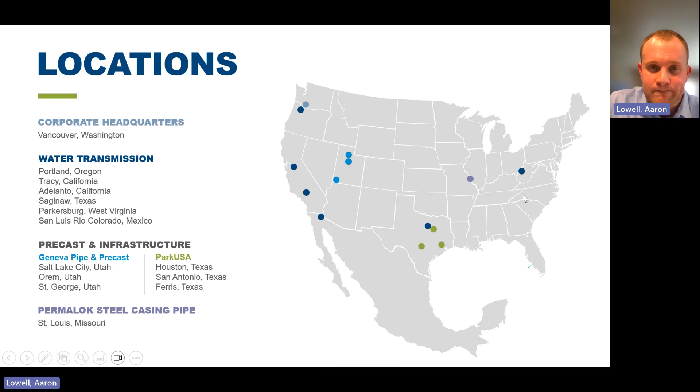Now, this line card here, I run around the Western region. I actually have this printed out on a little note card with my face on it, but this is our announcement to the industry that, hey, we're out there, we're manufacturing ParkUSA products out west at Geneva Pipe and Precast in Utah. You'll see some products there listed to the left, but we're not just limited to those products. That's kind of my main focus to get us started for really this first year and a half that we've been doing this.

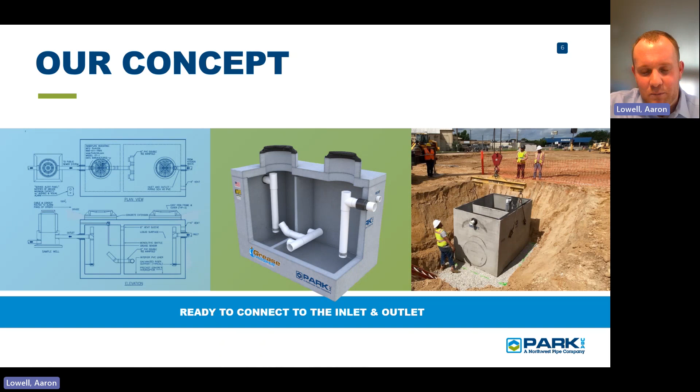So ParkUSA's concept is to take products that are pre-engineered, pre-approved, and pre-assembled for easy on-site installation by the contractor. And you'll see here, this example is a grease interceptor, and you'll see that it's all pre-plumbed. And I'm going to mention this throughout the presentation today. All of our products come to the job site pre-plumbed. So we provide a really nice value for the contractor that they don't really need to mess around with any of those internal components.

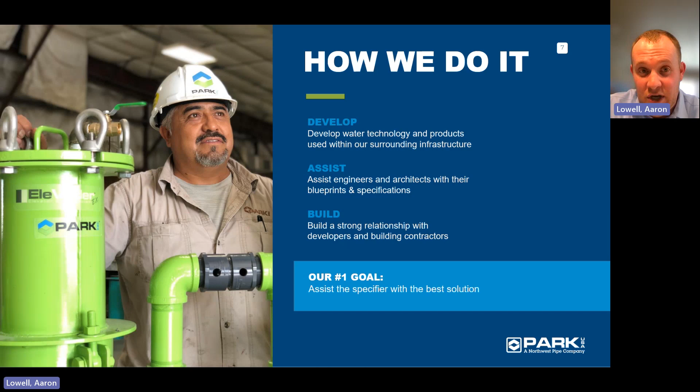So how has Park done this over the years? Well, we've been a very innovative company. The founders of the company have 6 patents in their name, including the oil stop valve, which Felisa is going to get into in about 20 minutes when we get to the wastewater portion. But Park's goal is to assist the specifying engineer with the best water solution for your project.

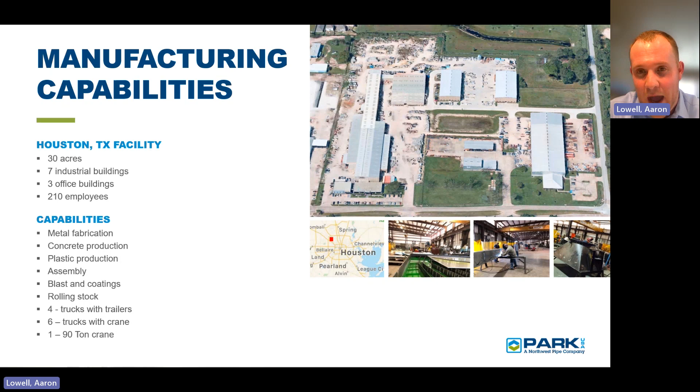Down in Texas, we have 10 delivery trucks running around the Houston area, and 6 of those are what's called a boom truck, or a crane truck for short. And these trucks are capable of offloading themselves, so they can offload about 15 to 18,000 pounds, depending on how far we have to swing the concrete off the truck. So that's a really nice value. And we're going to see several examples of that coming up throughout the slides.

This slide highlights a main product overview of all of the solutions provided by ParkUSA in all the different categories. So I'm going to kick off the presentation by talking about water distribution and pump lift stations. And then I'm going to transfer the presentation over to Felisa, and she's going to walk us through our wastewater, our stormwater, and our monitoring system products.

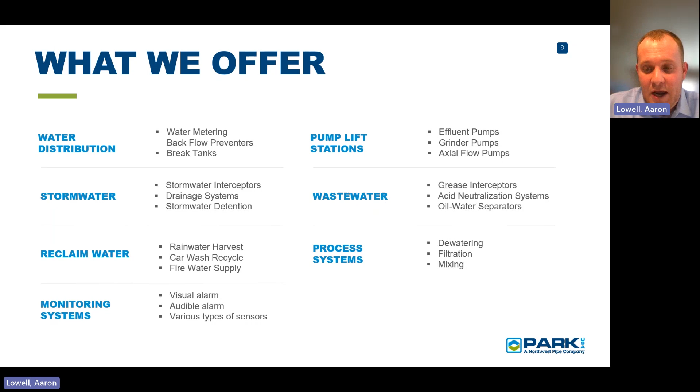So ParkUSA actually manufactures technology that kind of sets us apart from the competition. Let me give you an example. A grease interceptor with a sensor that can tell the owner if it needs to be maintained. So that's pretty cool. You'll see there reclaim water. We do a lot of the car wash reclaim tanks. Every new car wash they're building right now, which it seems that they can't build them fast enough right now. I know we're working on so many projects out west, but every job has about 4 or 5 different concrete vaults for us to provide. So that's really good business.

Okay, I'm going to get into our first category here, and this is water distribution. I'll give you a little background. This is really how ParkUSA got started. The company was founded in 1984, and the original founder of the company worked as a pipe fitter for a mechanical contractor in Houston. And so he would have to source these water meter vaults and deal with different vendors that supplied the concrete, the access hatches, the valves, the water meters, etc. And as the story was told to me, he got fed up with this and said, why don't I just do this on my own? And of course, founded the company in 1984.

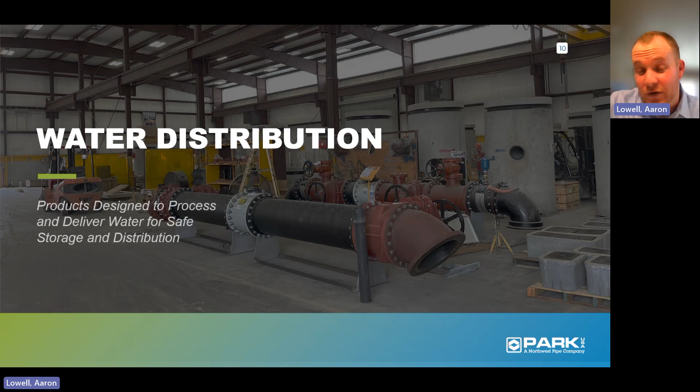So I'm going to start by playing a 1-minute video here. And what I want to highlight again is that our products are coming to the job site pre-plumbed. And for water distribution, they're also pressure tested before delivery. So enjoy the video here.

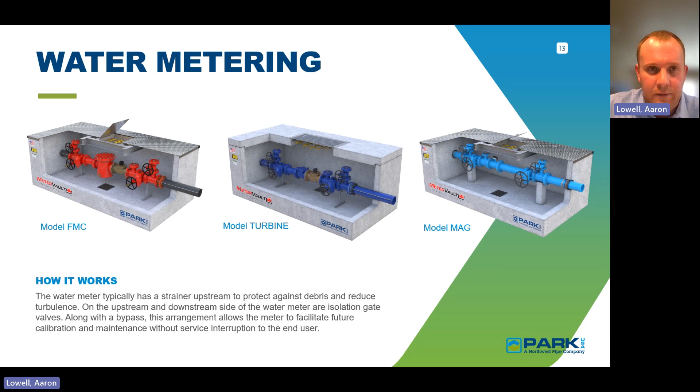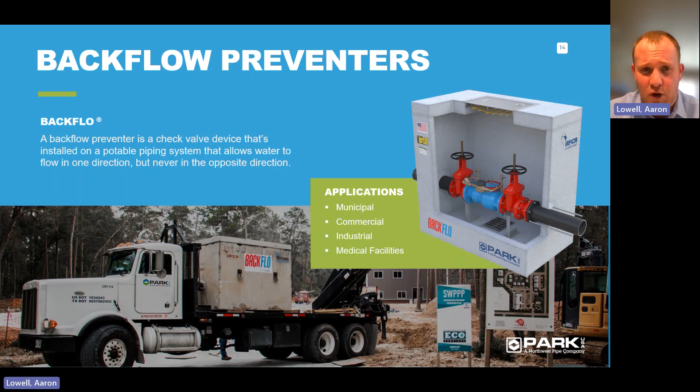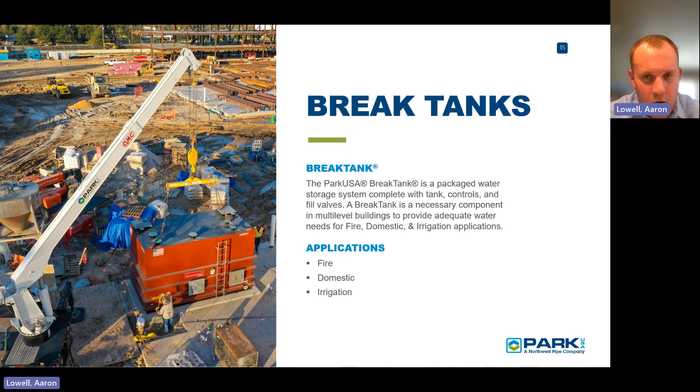Over there to the left, you can see that's an example of our boom truck. That's one of our larger crane trucks there, as an example. And also for the rectangular steel construction units, we can actually put a wall down the middle of the tank, and you can actually separate different water uses. So if you wanted fire water or vehicle washing water or irrigation, we can put it all in the same tank.

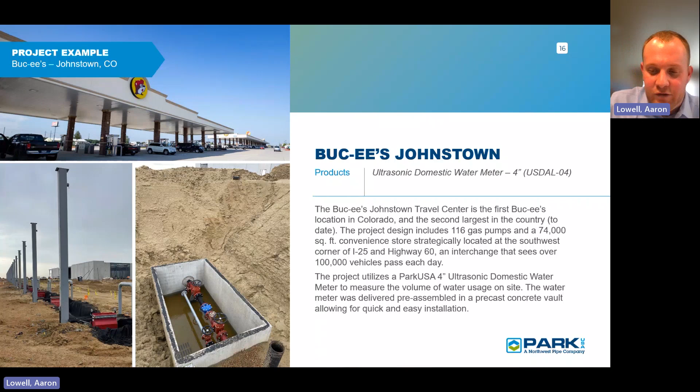But the engineer was out of Texas and they spec'd out on the plans our 4-inch water meter vault with a 2-inch bypass. So I'll take you in a little closer here. You can see all the water in the vault. We probably got an inch or two of rain that day. That pipe spool in the middle, that black pipe, that's actually where the water meter goes.

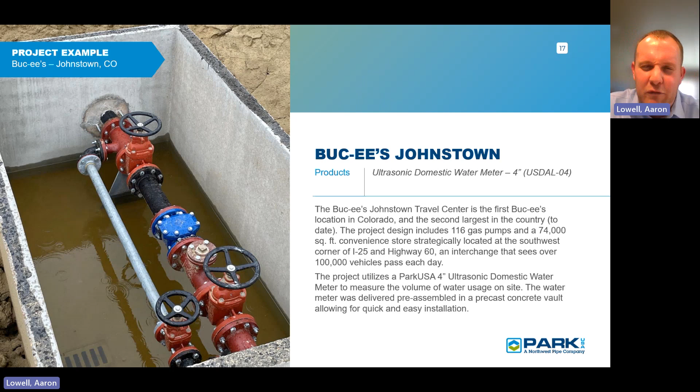So for this structure in Johnstown, Colorado, we did not supply the water meter. It was actually supplied by the city. And we do that all the time. There's a lot of municipalities that prefer to provide the meter themselves, and that's fine. We can still provide the vault fully assembled. You can see the 2-inch bypass piping on there. So it'll be fun to visit Buc-ee's here. The site's located about 40 miles north of Denver on Interstate I-25, just south of Fort Collins.

Okay, so that wraps it up for water distribution. I'm going to move into pump lift stations. And these are really cool. So what I've found in my travels is that sometimes the civil engineer and the mechanical engineer feel that lift stations are a little bit outside of their realm.

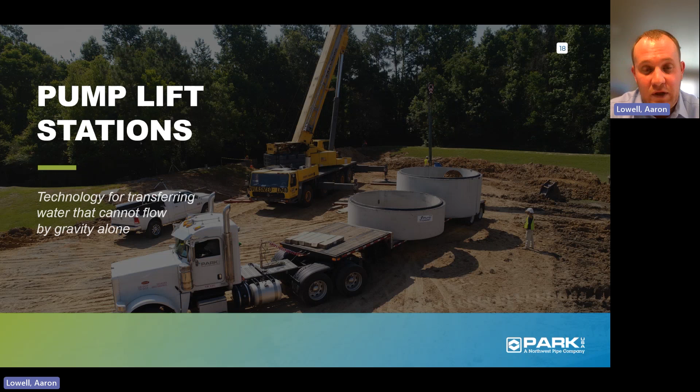So we're going to highlight this. I got another video here. It's branded the Pump Trooper. So the video is going to take you through and show you why lift stations are important, kind of how they're used, and highlight some really cool projects that we've had the chance to work on over the past 5 years.

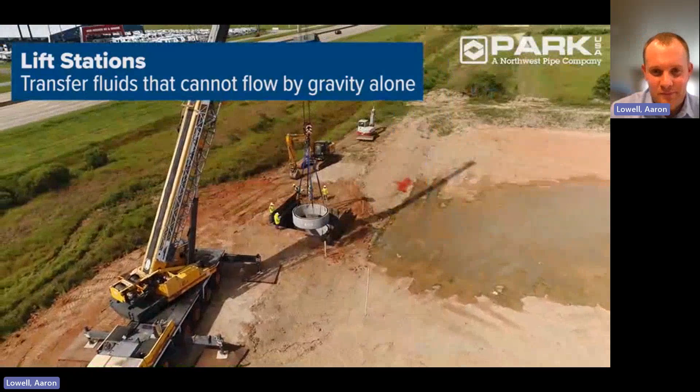Water always finds its way to the lowest point in an area. This pull of gravity can easily lead to flooding, which can create health and safety hazards as well as property damage. Lift stations make it possible for commercial, residential, and community developments to defy gravity, collecting stormwater and wastewater in low-lying areas and conveying it to the municipal collection system at higher elevations. The Pump Trooper by ParkUSA, a Northwest Pipe company, is a submersible pump lift station that offers a reliable and cost-effective solution for fluid conveyance and flooding control.

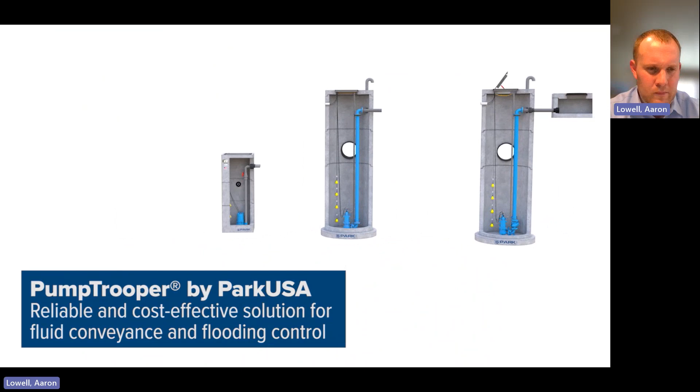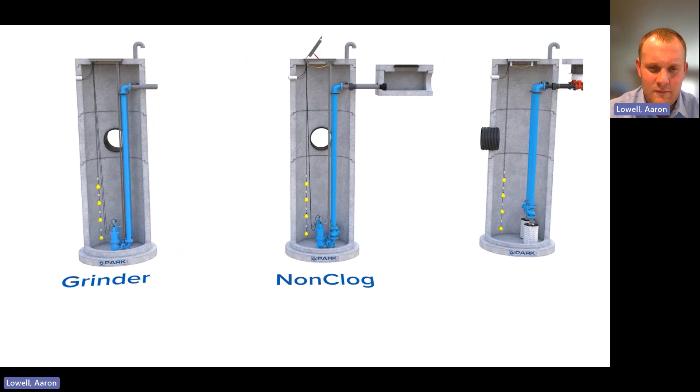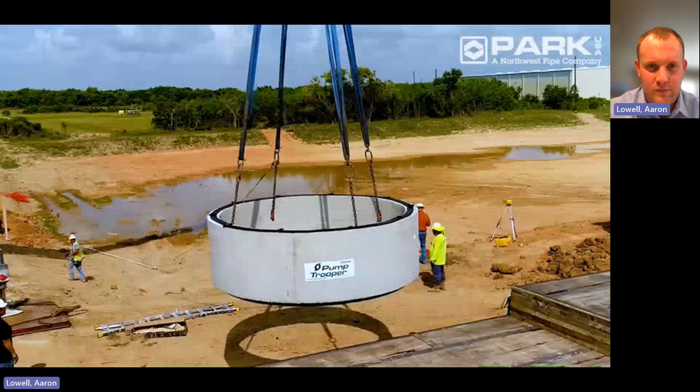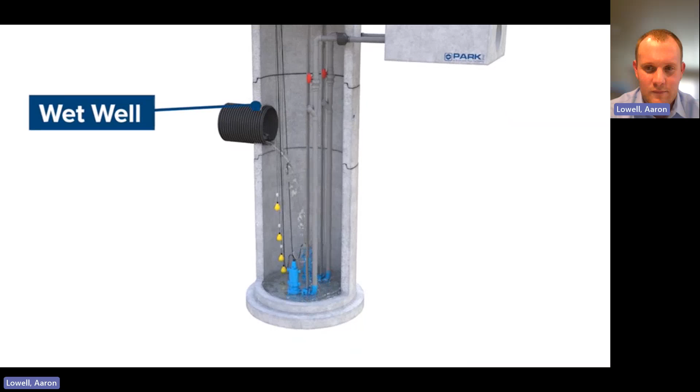With a variety of custom configurations available, we design our lift stations to the exact specifications and capacity requirements of your project. The most commonly used design is the duplex system, consisting of 2 pumps alternating in operation. Multiple pump installations like this provide continued service in the case of pump failure or maintenance and extra capacity in times of extraordinary loading. The Pump Trooper lift station works by collecting sanitary wastewater or stormwater into a wet well through an inlet pipe. As the well fills, an electric liquid level control system monitors the water level. When the water reaches a predetermined level, the pump engages, transferring the water up and out of the wet well basin into the sanitary or stormwater system.

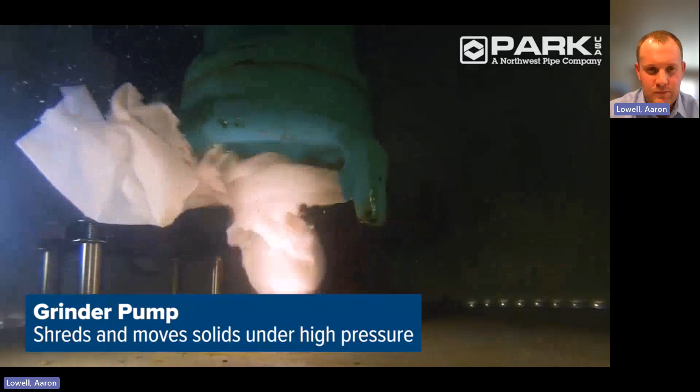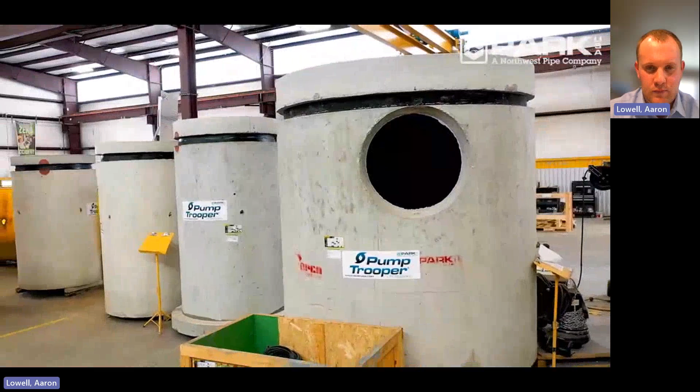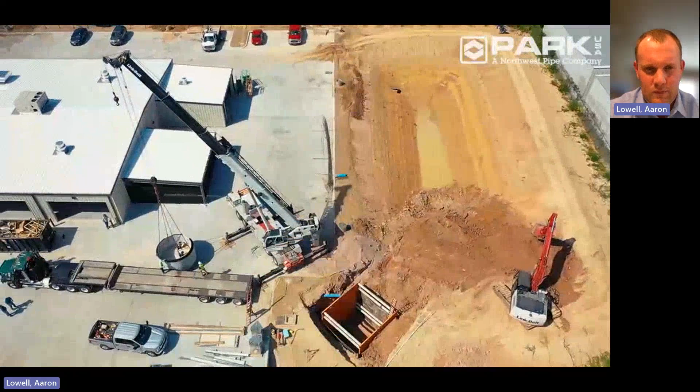For high pressure or higher head applications, a grinder pump is recommended. The powerful grinder pump features sharp cutters that shred solids and move them under high pressure through smaller diameter pipe. The Pump Trooper is powered by a close-coupled electric motor, which operates quietly and is cooled by the moving liquid for a maximized service life. Made in the USA, our lift stations are pre-assembled in a controlled manufacturing environment, ensuring the highest quality product is delivered to your job site, ready for connection. Our team works directly with the field contractor to ensure proper placement and installation. Designed for the unique demands of commercial, industrial, municipal, and residential environments, the Pump Trooper meets all building codes and comes with a variety of application-specific pump styles.

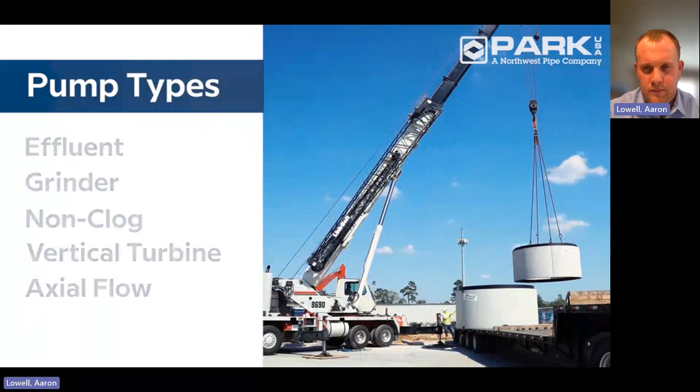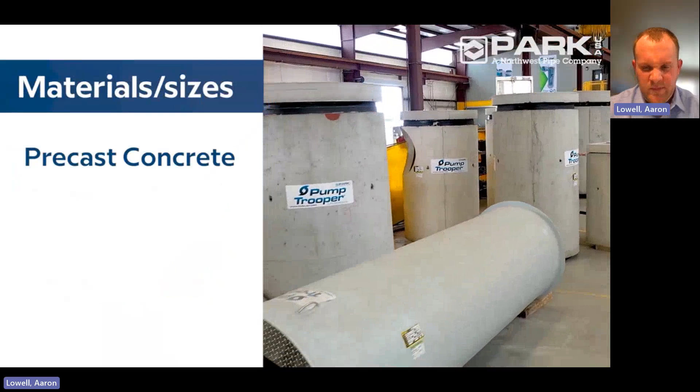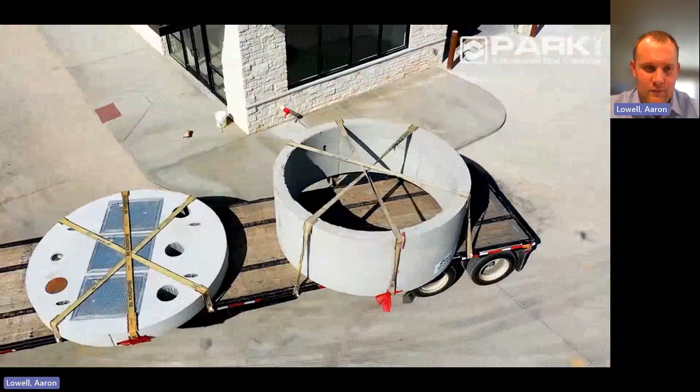The valve assembly can be housed in the wet well basin for smaller stations or in a pre-assembled valve vault for larger stations. Pump Troopers are available in precast concrete or fiberglass construction in a variety of sizes and with a selection of interior liners and an optional remote maintenance alarm. From corporate business parks to residential complexes, contractors, engineers, plumbers, and building managers rely on the trusted performance of ParkUSA Pump Trooper lift stations to keep their stormwater and wastewater moving onward and upward. Contact us to learn more about our water and wastewater solutions or visit us online at parkusa.com and nwpipe.com.

So these lift station systems are pretty cool, and they're really important in a place like Houston where we provide hundreds of these things. If you think about Houston, it's 600 square miles, and with 50 inches of precipitation, the need to move water is incredible. I personally lived in Houston during Hurricane Harvey, so I got to see how important it is to get the water moving out of there, with 3 feet of water.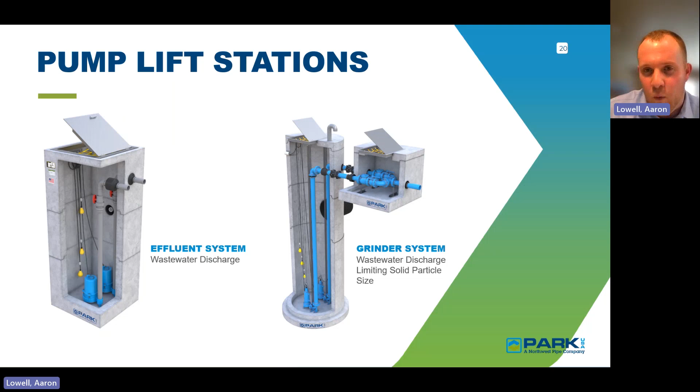Over here to the right, this is an example of one of our sanitary wastewater lift stations with grinder pumps. Typically, any lift station involving sewage will have a separate valve vault with an air release. And as you saw in the video, we'll provide that valve vault system all pre-plumbed to the job site as well.

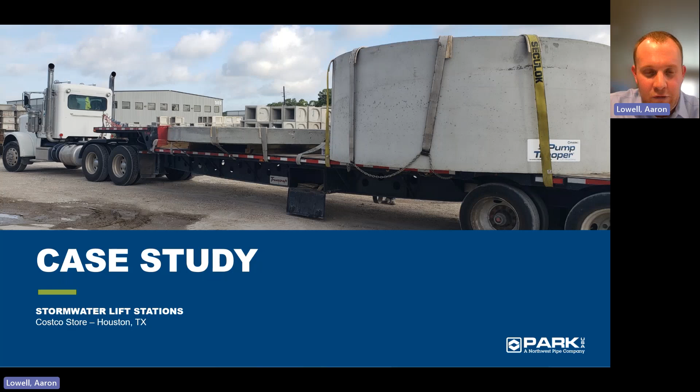Okay, now I'm going to move into an example project here. This is a Costco warehouse store in Houston. So very, very large scale here. Look down on the bottom: 144-inch diameter manhole. This 12-foot size is very unique in the precast industry. Not a lot of precast folks have a 12-foot diameter manhole form.

So that's something that's kind of unique to Park almost. 27 feet deep in the ground. Think about where this lift station is. It's in Houston, so the city is 25 to 40 feet above sea level. So groundwater is usually pretty high, let's call it 4, 5, 6 foot deep. So your system's 27 feet deep. Well, what does that mean? This thing is way down deep into the water table. So we want to make sure that it's not going to pop out of the ground, right?

Think about this cylinder, 12-foot diameter, 27 feet tall with no earth cover over the top. So it's very important that we run a buoyancy calculation for these types of systems. And you can see down there on the bottom, there was a 24-inch extended base for the system. And we'll get to see that being installed on the next slide.

Over here to the top right, this is our keyed notes or our bill of materials. We're providing everything that you see there. Towards the middle of the page, you'll see the ParkUSA model number. So if you're an engineer and you need to spec out a lift station rather quickly, and maybe you don't want to wait a week or two for us to get you a design, you can spec it out with just that code and download a standard lift station drawing from our website.

We just need a few pieces of information there: the wet well size, how many pumps there are, pipe sizing, flow rate, power characteristics, and things like that. But if you have the time, I'll show you how to start a new project with Park here in a minute.

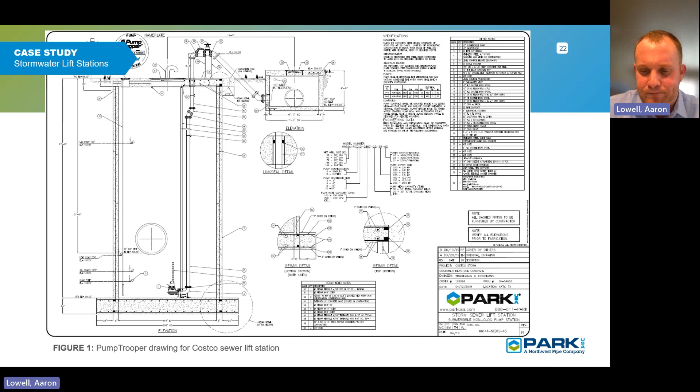Over here at the joints, you'll see that black tar sticky stuff. That's called butyl mastic joint sealant, very common in the precast industry. Usually comes in rolls that are 1 inch or 1.5 inches wide. Some of the brand names for that product include ConSeal, which is a company from Ohio, and RamNek, which is a company from Texas.

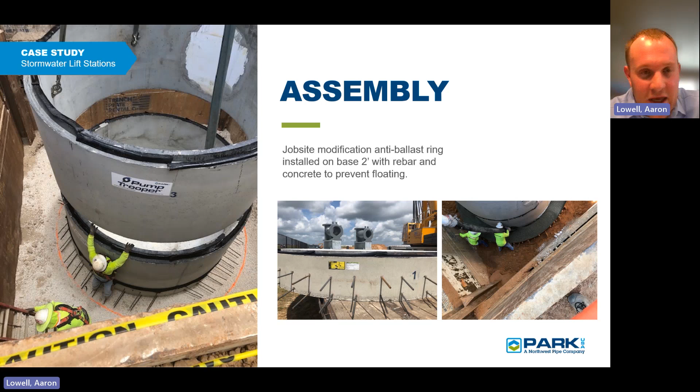Here's how it works. So the contractor lays that on top of the joint, and then they drop the piece down. Keep in mind, this piece may be 35, 40,000 pounds for a 12-foot manhole. And that black tar sticky stuff, the mastic, it just pancakes, and it forms a watertight seal to keep water in and keep water out.

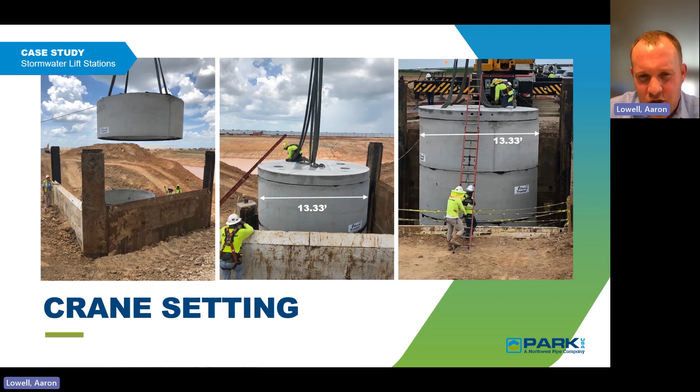So depending on job site conditions, maybe they need to swing the pieces like hundreds of feet. Well, it might be necessary to upsize the crane, maybe to a 200-ton, 300-ton crane or more. At ParkUSA, we generally stay out of the crane sizing discussion. You did see we have a 90-ton crane running around the Houston area. But we stay out of that. We let the civil contractor, the installing contractor, work that out with the crane company.

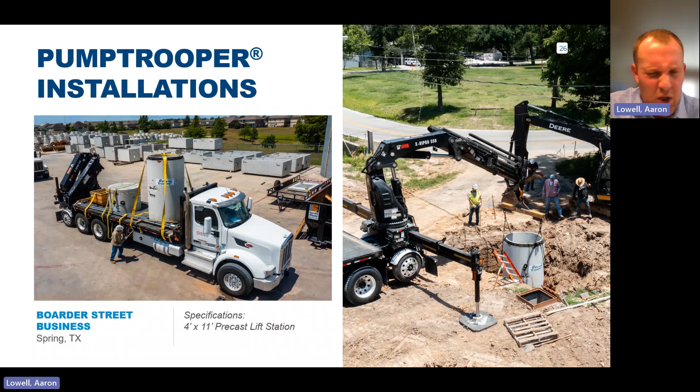Okay, moving into this project example, this is the Caldwell Canyon Mining Wash Bay. This project is located up in Soda Springs, Idaho. It's kind of the southeastern corner of Idaho, not too far from Jackson, Wyoming, actually. The project had 5 ParkUSA products, 2 lift stations, 2 oil water separators, and a 5,000-gallon sand mud interceptor.

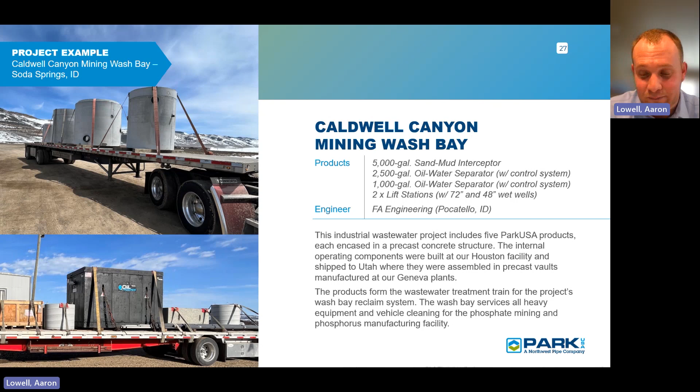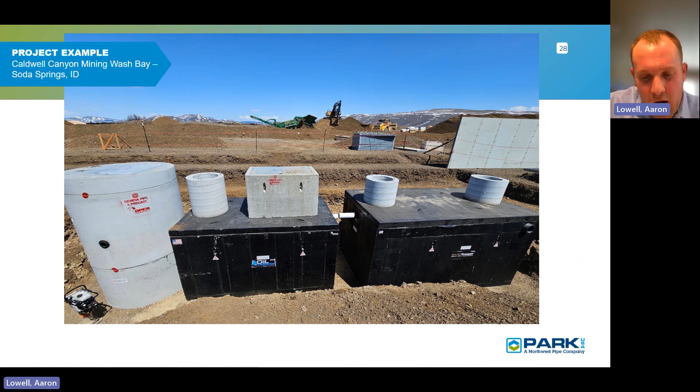Then the water flows through the oil water separator, and that's our coalescing media pack unit. Again, Felisa is going to show us here in a minute. There's an access hatch over the top. So that system will need maintenance periodically, so that hatch allows a little bit more wiggle room to perform those maintenance activities. And then from the oil water separator, it flows into that 72-inch wet well lift station all the way to the left. And then it gets pumped out to a force main to a different area of the site. So this was a really cool project and really our first large project that was made at Geneva this year.

Now, let's say you have a lift station. You're thinking this stuff from Park is great. How do I get a pump trooper going? We do have a lift station design request form. So we need a few pieces of information to get started. We need to know the project name, the location. What is the system being used for? Stormwater, wastewater, industrial, the power characteristics. Usually these systems will have 480 three-phase power, unless it's small, just pumping out like one bathroom as an example. So if you can just fill this out, we'll get this to our pumps and control supplier.

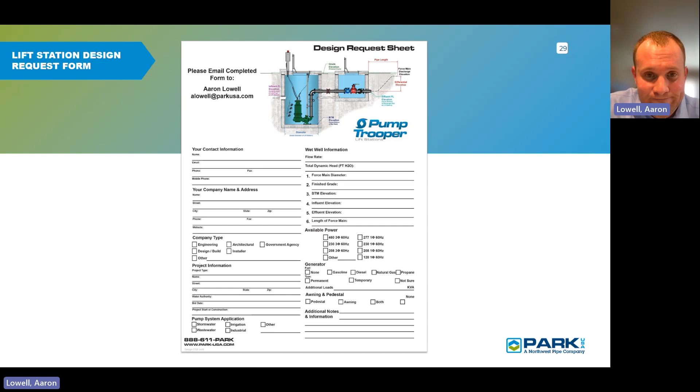And like I mentioned, we need about 2 weeks to come up with a site-specific drawing, like the Costco project you just saw. We can get that for you to slap on the plans. We can get you the CAD file. So if you have any lift station projects, don't hesitate to reach out. So that wraps it up for my portion about water distribution and pump lift stations. So now I'm going to transfer the presentation over to Felisa, and she's going to talk about our wastewater, stormwater, and monitoring systems.

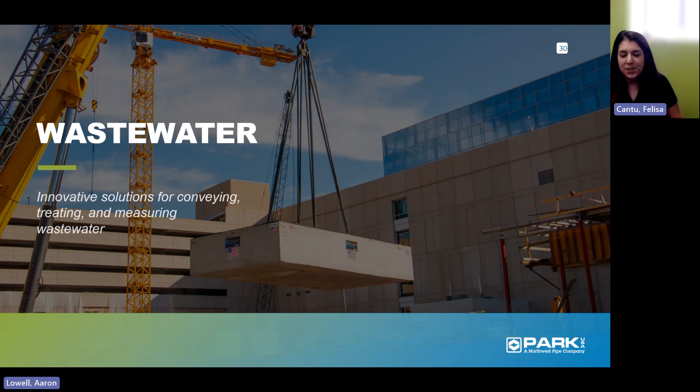Thanks, Aaron. So if you're already familiar with the ParkUSA name brand, it's most likely due to our wastewater products, like our grease interceptors and our sand oil interceptors. So we'll be highlighting those products today. First, we have our grease interceptors. So these are used to remove any kind of fats, oils, and greases from our wastewater. You'll see these spec'd out in any kind of project where there's a commercial kitchen. So think your fast food chains or your restaurants, or anywhere where there's a large kitchen as well, or large cafeterias like your schools and your office complexes.

So we manufacture a variety of different sizes. Our 500 to 6,000 gallon interceptors are actually UPC listed, IAPMO certified, but we also offer up to 20,000 gallon capacity interceptors as well. So what sets Park apart from our competition is we have a wide variety of value add options available. For example, on our precast interceptors, you can choose to include different kinds of epoxy coatings or HDPE liners to extend the life of that precast. But maybe precast isn't the right material for your project because you need to install these either above grade or you're looking for maybe a lighter weight product. We are also able to manufacture these products in-house using stainless steel material, and then we offer them in a fiberglass material as well.

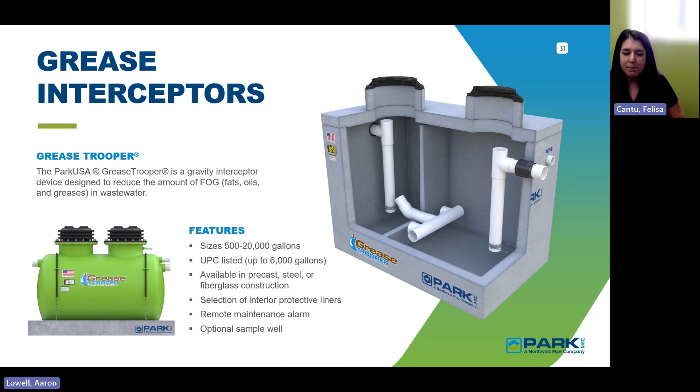As Aaron mentioned earlier, we have our own internal controls department that manufactures our own maintenance alarm systems. And then if your municipality requires a sample well, we're able to provide that to you as well. On the next page here is a great visual of kind of everything that we discussed.

I guess start off with some of our standard features. You'll have the precast tank, which will always include the internal piping and traffic duty rated rings and covers. These features may seem kind of basic, but this is actually a big value add to our contractors just because it reduces any kind of additional work in the field.

Moving into our value-added options, you'll see the interior of the tank is colored orange, and that's to essentially represent the different kinds of coatings and liners that we do offer. For example, if you were going to include an epoxy coating within your interceptor, this could extend the life of your product maybe 5 years or so. But we also have an upgraded HDPE liner that can extend the life of your product maybe up to 30 years or so.

Moving on, in this visual, you'll see a grease sensor, and included with this grease sensor, not shown, is a remote alarm panel that's typically installed inside of the building. This sensor detects any kind of grease buildup in the interceptor and sends a signal to the alarm panel. The alarm panel will then emit an audio and visual notification, letting the end user know that maintenance is required at the unit.

And then last up here, you'll see one of our sample wells. We provide these sample wells in a variety of different sizes and materials. So again, if that's a requirement for you, we're able to provide those as well.

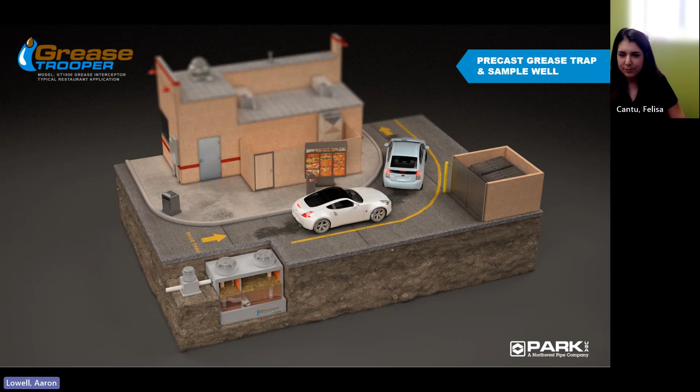Next up, we'll be highlighting some different installations that we've seen in the past couple years. Here on the left-hand side, we'll start off with this rectangular orange interceptor. This was actually installed in Houston, Texas at Minute Maid Park, home of the 2022 World Series champs, the Houston Astros. Minute Maid Park was constructed in 2000, and with this initial construction, there were some grease interceptors that were installed.

Over time, these began to fail and corrode, and so ParkUSA was contacted to manufacture new stainless steel interceptors in their place. Because this was a pre-existing site condition, we wanted to ensure that what we built would fit within the existing walls and door frames of the building. So we were able to send a member of our steel fabrication department down to the ballpark to take very specific measurements.

Another unique thing about this specific design is that the inlet and outlet are located on the side wall of the grease interceptor, when typically you'll see these spec'd out on the ends of the interceptor. Again, that's one of the great things about using stainless steel material. You can customize the dimensions as needed and include some different designs as well.

Here on the right-hand side, you'll see some green cylindrical grease interceptors that were located at an Amazon facility in Houston, Texas. The unique thing about this project is that these were initially designed to be installed below ground. But over time, there were some changes with the design, and these ended up being installed above ground in a basement. But these could still be easily accessed for maintenance purposes from the deck above.

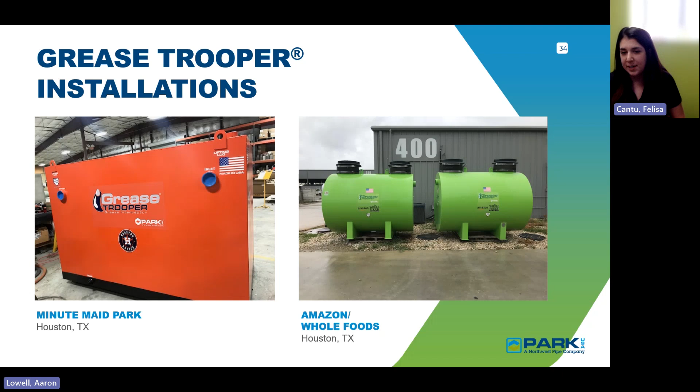Next up, we have a project for a school up in Nucla, Colorado. This is a great example of a precast interceptor that includes both interior and exterior epoxy coatings, again to extend the life of the precast. All of our interceptors, no matter the material, come pre-piped, as you see in the middle pictures there. And on the right-hand side, you'll see some of our quality control stickers. All of our products go through an intensive QC process prior to being delivered at the job site.

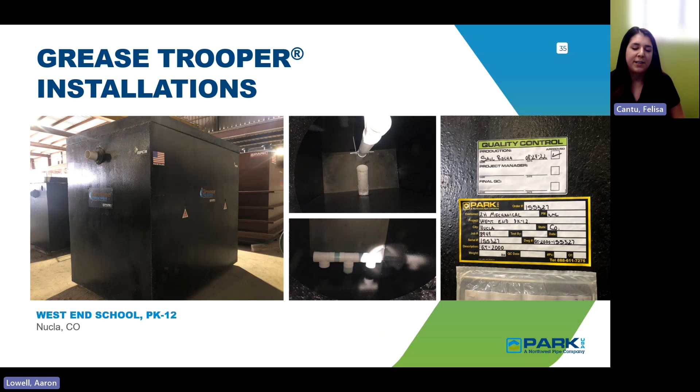Next up, we have another project in Denver, Colorado, and this is for McGregor Square, which is an entertainment area that's actually owned by the Colorado Rockies. So in this area, it has a bunch of cool restaurants, bars, and luxury hotels and apartments, but we actually installed 22,000 gallons of grease interceptors at the location. And breaking that down, that includes 3 6,000 gallon interceptors and 1 4,000 gallon interceptor.

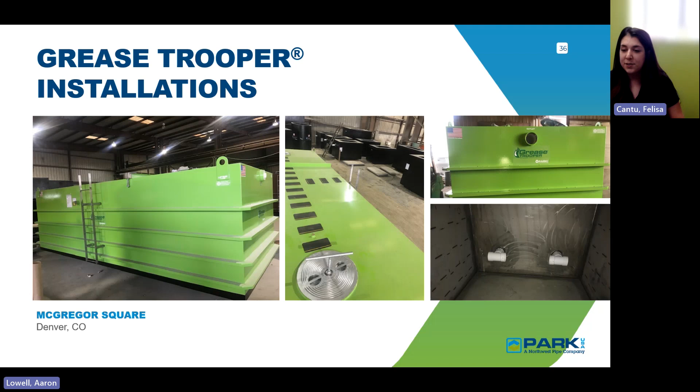Another thing that we did to kind of ease the maintenance requirements for this interceptor is we switched out our standard traffic duty rated rings and covers and used an aluminum gas tight ring and cover instead. This reduced the weight of the ring and cover maybe about 40 to 60 pounds or so. And again, this feature just eases the maintenance requirements for that worker going out and checking that interceptor. And then again, on the right-hand side, we will stress no matter the product, no matter the material, all of our interceptors do come pre-piped.

Then last up for our examples, we have a fiberglass interceptor that was installed in Fort Worth, Texas. So this is another project that ended up being installed in a basement level, so an above grade application. Both stainless steel and fiberglass can be used for above grade applications and those dimensions can be customized as needed. But we typically find that between the two materials, right around a 3,000 to 4,000 gallon mark, fiberglass is the more economical solution.

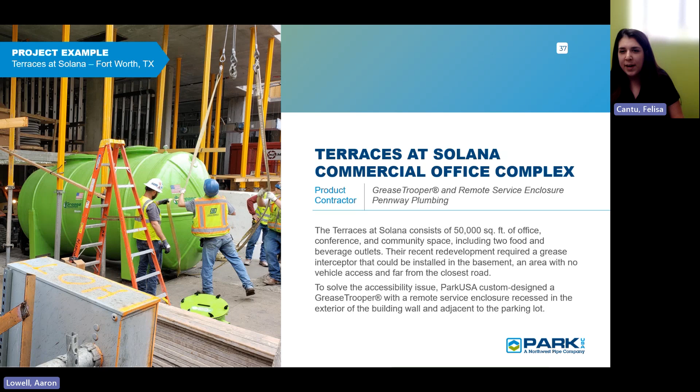So next up, we have our sand oil interceptors, and these products are used to remove any kind of sand, debris, or oil from our wastewater. So you'll typically see these products in any kind of car wash facility or any kind of car maintenance facility. So you're probably most familiar with a sand oil interceptor of precast design with an interior baffle and some piping. But we actually have an upgraded, more enhanced model that you see here on the right-hand side. And within this design, it includes a couple of different technologies.

As Aaron pointed out earlier, we have something called our coalescing media packs that uses a coalescing oil attracting material to just further enhance that oil separation from that wastewater. And then on the outlet side, we have something called an oil stop valve, which can detect any kind of oil that does pass through the coalescing media and essentially shut off any kind of effluent from leaving that interceptor. And then another thing that it's kind of hard to see here, but we also have an oil sensor installed within this tank, which can detect any kind of oil buildup and send a notification to our remote alarm panel indicating that maintenance is required at this unit as well.

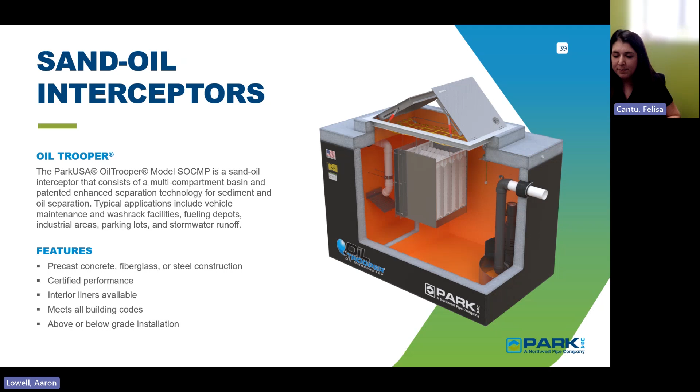So this is a design that's typical of our larger capacity units from 500 maybe up to 2,500 gallons or so. But we also offer this same design concept in a smaller footprint as well. So on the next page here, you'll see a 400-gallon oil water separator that was installed at the Cowboys practice facility up in Frisco, Texas. You'll see that this is a smaller capacity unit and therefore it has a smaller footprint as well.

So this design is typical of our 150 to 400 gallon capacities, but again, it includes the same kind of technology as well. It includes coalescing media plates and that oil stop valve and the high oil alarm system as well. So along with this practice facility at the Dallas Cowboys Stadium, we also provided a couple of different water distribution products and 4 12,000-gallon grease interceptors as well.

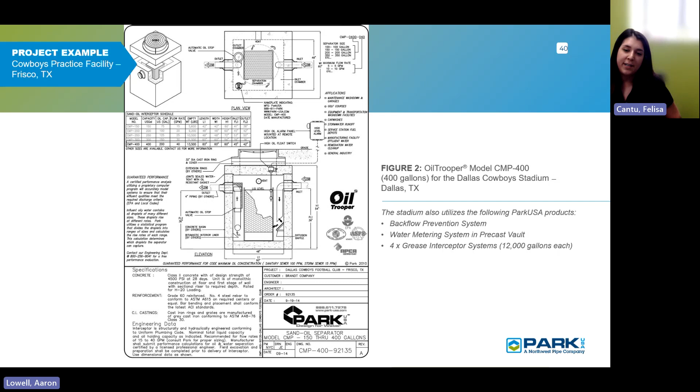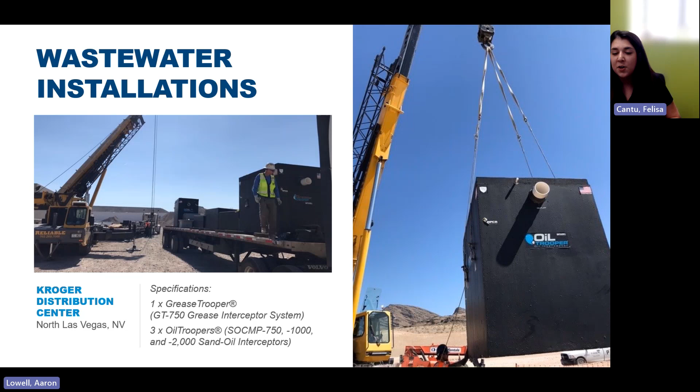So next up, we have a project that we recently delivered. This was for an 885,000 square foot Kroger distribution center located in the northern Las Vegas area. And this center is going to be used to truck food and groceries to a variety of different states in the West. And for this specific project, we included one grease interceptor and a couple of different sand oil interceptors that were used to service the garage and a couple of different vehicle maintenance facilities on the grounds.

On the next page here, you'll see an example of an installation for our sand oil interceptors. Again, all of our tanks do come pre-piped just to sort of ease that installation process for our contractors. Here you'll see a hatchway that's precast into an extension. We can include these hatchways either precast as shown, but that does limit the adjustability in the field. So we typically do provide these loose instead. So that wraps up our wastewater section.

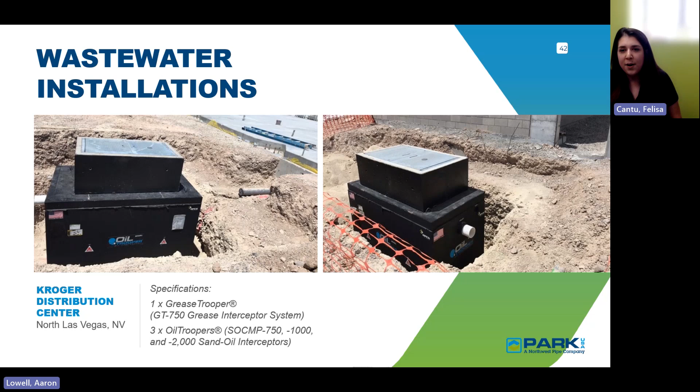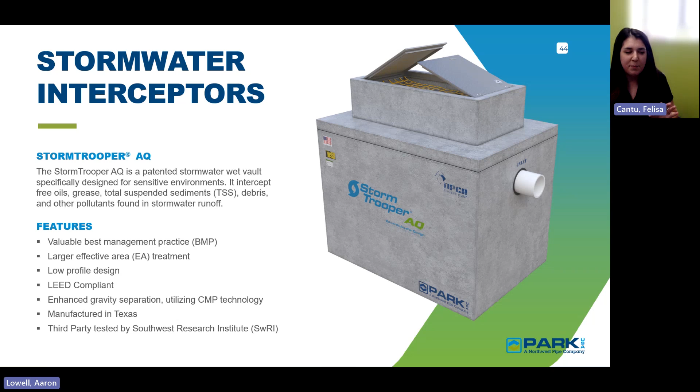We'll be moving into the stormwater section, highlighting a couple of different products in our stormwater line. So to start off, we have our stormwater interceptors that we market as our Stormtroopers. So these products are used again to remove any kind of oil or trash, any kind of debris, but for stormwater runoff. So you'll typically see these spec'd out in any kind of project with any kind of large drainage area. So our stormwater interceptors follow what we call an offline system. So these are designed to include a separate control manhole and stormwater interceptor.

On the next page, you can see some internals of what a typical stormwater interceptor looks like. But these are designed to treat the first flush flow of any kind of stormwater runoff, which typically is the initial stormwater runoff that contains the most pollutants. So this stormwater will enter our control manhole, and the first flush flow will enter our stormwater interceptor, where it's treated to remove any kind of debris or oil from the stormwater.

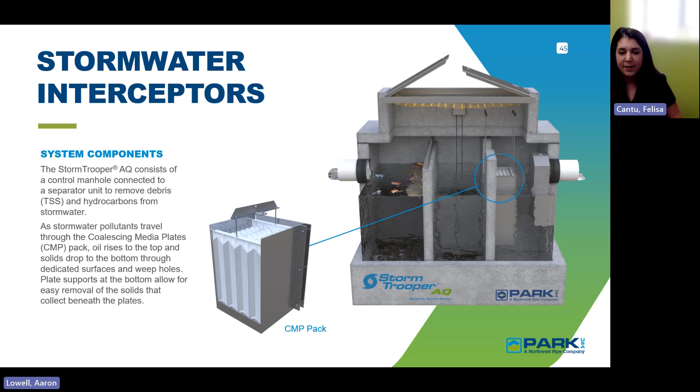These designs also include the use of those coalescing media plates, again, just to further enhance the separation of oil from the stormwater. Once this water is treated, it'll then exit the stormwater interceptor and continue through the control manhole onto the storm sewer system. And then for high flow conditions, our control manhole does also include a trash screen and a bypass weir to bypass that high flow.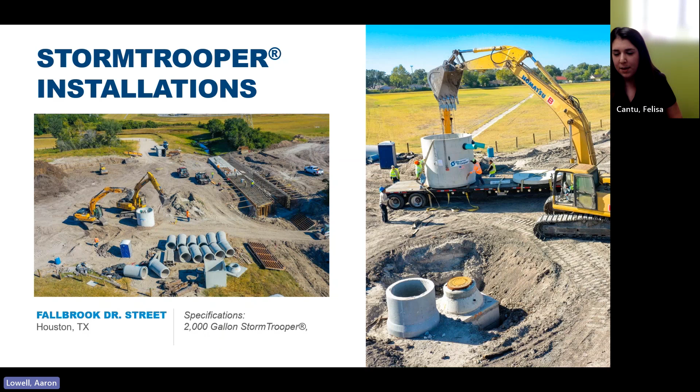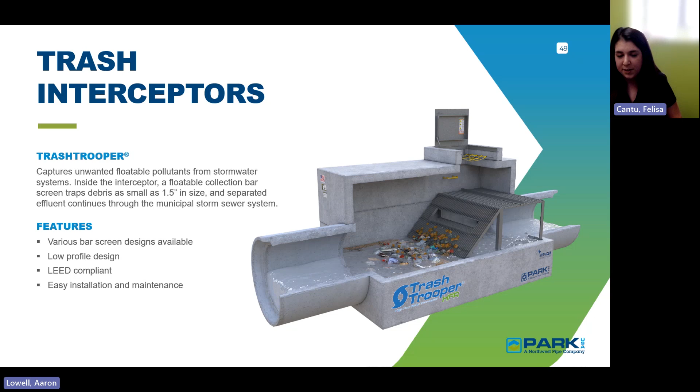Moving on, we'll highlight our trash interceptors. So I think we can all recognize that no matter where you are in the country, trash is an issue. So we designed our Trash Trooper to help mitigate this problem. This product includes a concrete vault with a stainless steel bar screen within the vault. And this bar screen is designed to capture any kind of small debris or trash that is flowing through our storm sewer system. This design also includes a hatchway just for ease of maintenance to get inside the unit and kind of clean up that trash as needed. But we see this product having huge potential on the Western coast. For example, in California, there's some municipalities that do have a trash mandate in place, so this would be a great option to consider.

Moving on, we have our water control systems. So these products are used to control the flow of water. We see these typically spec'd out in a bunch of different drainage or irrigation type products. And the way they operate is this red valve opens and closes using that hand wheel. So it is a manual type of operation. But these can also be operated remotely using an electric motor. But in general, these valves can be included in a variety of different precast structures and are generally low cost.

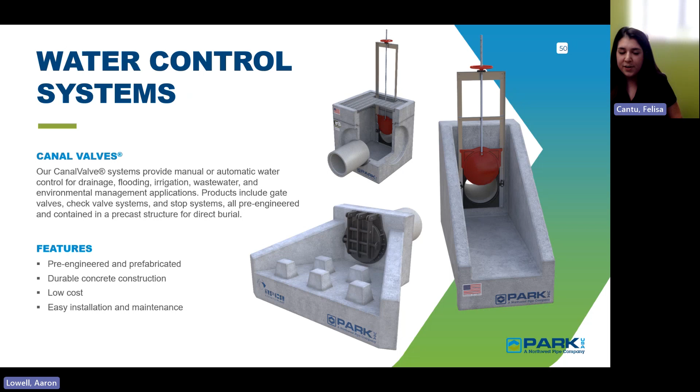Moving on, we are going to touch base on our stormwater drainage products. So here on the right-hand side, you'll see our headwall, which is also called a wing wall, depending on where you are in the country. So we have our standard precast headwall, but we can also include a galvanized debris screen on this headwall as well that can capture any kind of trash. And then here on the bottom left-hand side of your screen, you'll see our safety end treatment. And again, both of these products are used to kind of reduce erosion and scour that's caused from stormwater runoff.

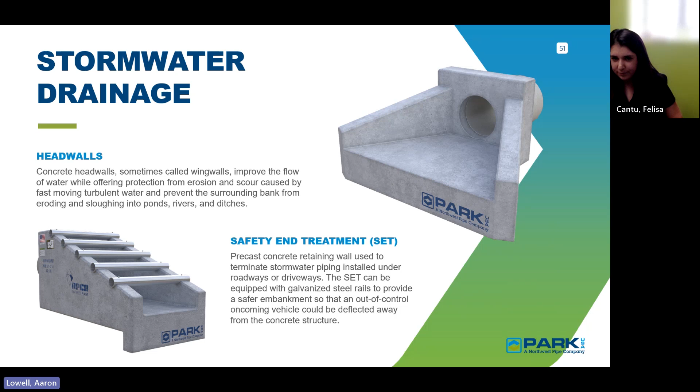And then last in our stormwater product review, we have our Fox diversion valve system. So this is actually an Australian product that we're seeing used more and more across the States for any kind of washdown application. So you can think either like a car or truck washdown, or if you're trying to wash down near a dumpster to get rid of any of that dirty dumpster juice, this is a great option to consider. And Park is actually now only one of two distributors here in the US.

So the unique thing about this system is that it requires no electricity to operate. It operates entirely off of water pressure. So when this valve senses water pressure from a washdown event, the system opens and sends all of that washdown water to the sanitary line, which can eventually make its way maybe to an oil water separator. And then when washdown ends, the water pressure stops, the valve closes, and redirects any water from rainfall down to the stormwater sewer instead.

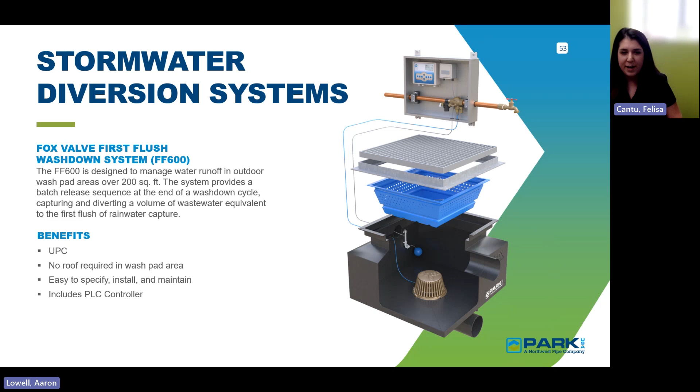This next Fox system is a little bit different in that it does require electricity to operate. There are some additional components that you can see. It has that blue water sensor and a control panel included. And these specific designs are typically used for larger wash pad areas over 200 square feet.

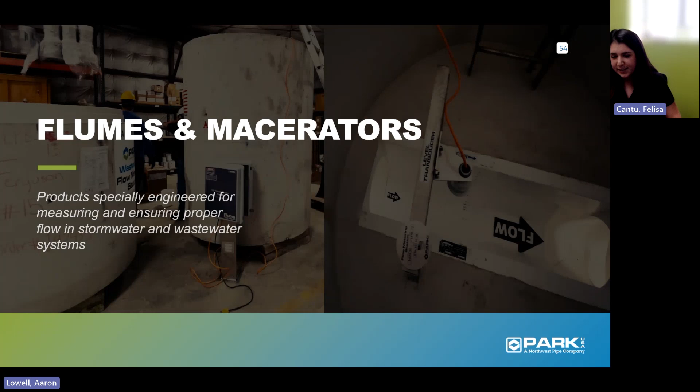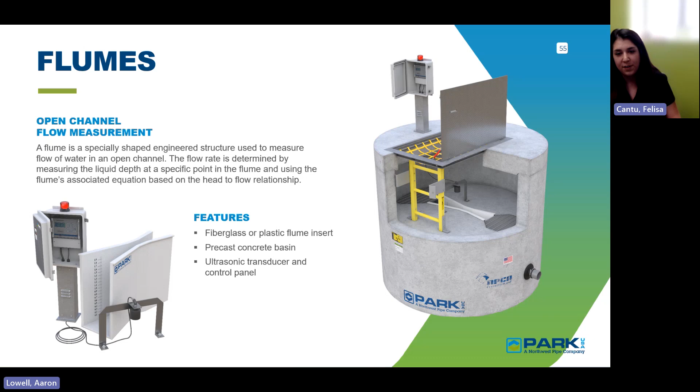Next up, we have our macerators. Our macerators are currently using a Vogelsang brand grinder pump, and this is essentially to cut up any kinds of solids that are gravity flowing through our sanitary sewer lines. We see these spec'd out in a lot of projects for either like prisons or jailhouses, where inmates may be stuffing up the toilets for whatever reason. But these would also be a good option to consider if you have any kind of project where there's potential for baby wipes to be flushed down the toilet, which can also clog these sanitary sewer lines.

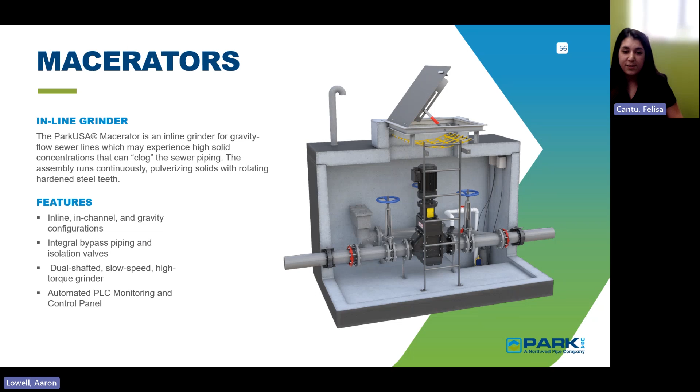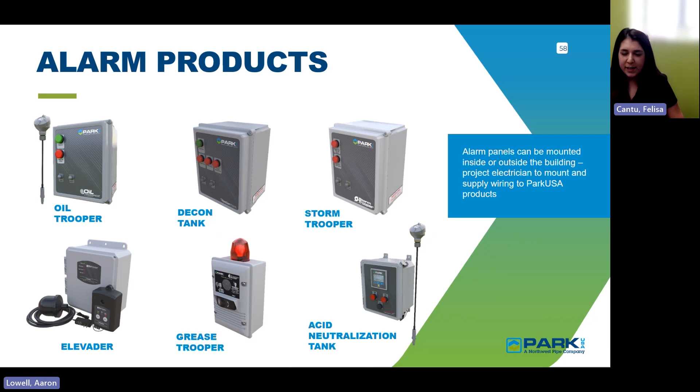Next up, we'll be highlighting our monitoring systems. So moving into it on the next page, you see a wide variety of maintenance alarm panels that we do offer. For all of our wastewater products, there is an alarm panel that can also be included in the design. And we highlighted our grease alarm panel and our oil alarm panel, but we also have products called our decon tanks and some acid neutralization tanks that do have this capability as well. And again, these products are a big value add for our end user just because it easily alerts them when maintenance is required at the units.